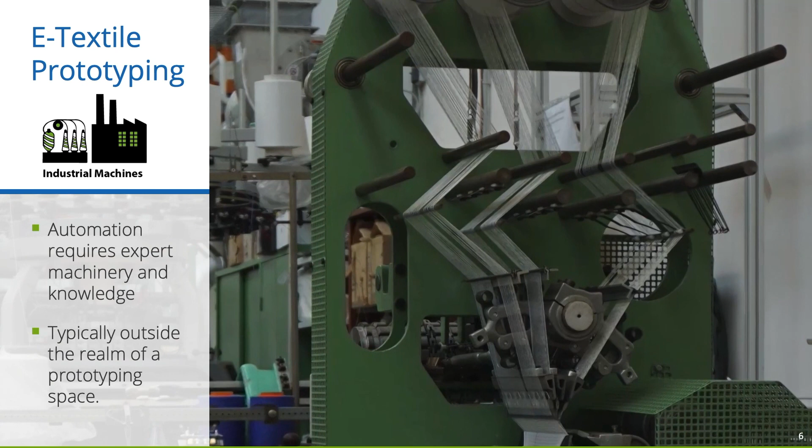While makers have great technical skills and the capabilities to innovate and prototype, they often use manual sewing techniques. However, manual fabrication at the yarn level is quite time-consuming and cumbersome. In addition, textile and fashion designers require wearable prototyping toolkits for early design stages, but they commonly do not have access to expert machinery. These kinds of machines are typically outside the realm of a prototyping space.

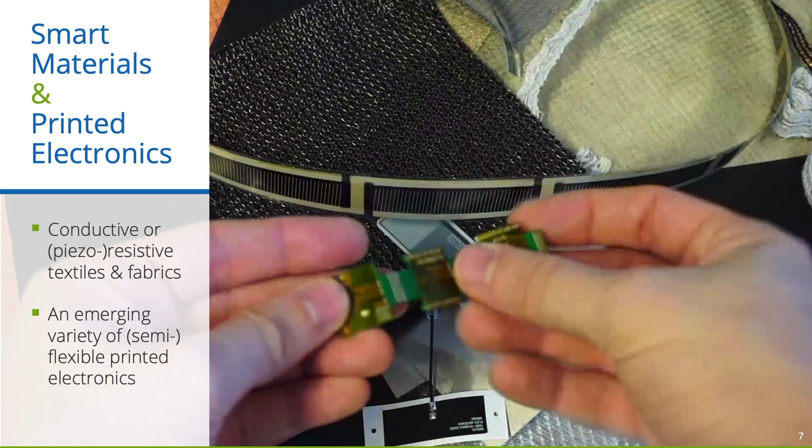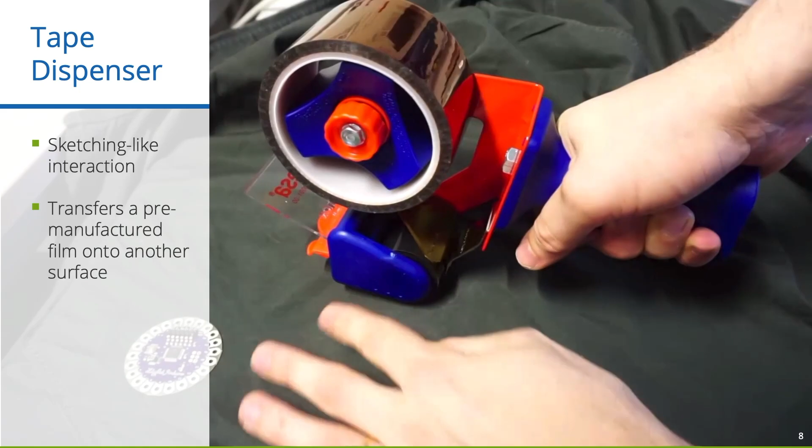By looking at emerging materials like conductive or resistive fabrics, as well as the continuous progress in flexible and printed electronics, we thought about how we could develop an easy and sketching-like fabrication approach. Inspired by the sketching-like interaction of handheld correction tape or packaging tape dispensers, we introduce Rapid Iron-On User Interfaces, a novel fabrication technique to combine design and fabrication into a single process.

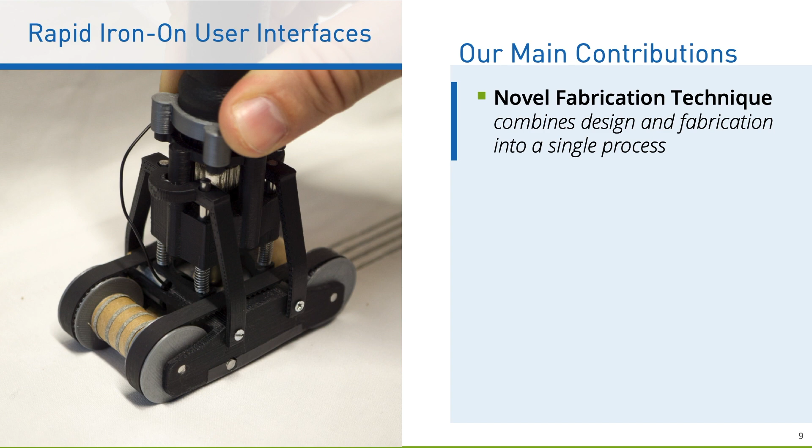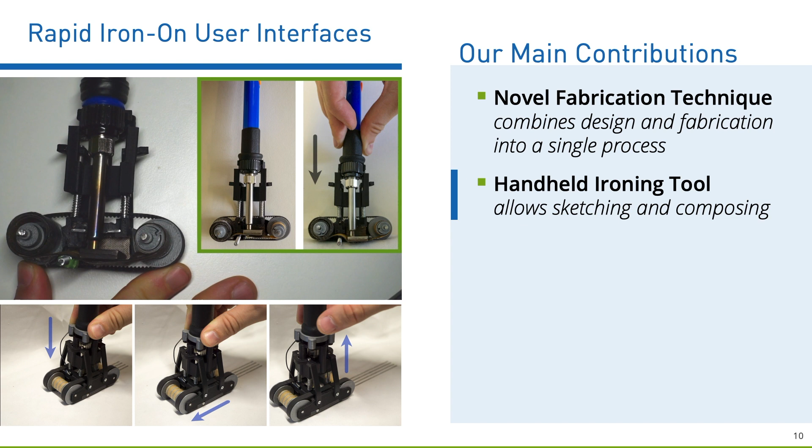We developed a handheld ironing tool that directly transfers adhesive functional tapes and patches onto fabrics. The device uses an iron that can be pushed for bonding tapes via heat activation. The tapes themselves are rolled on spools with a carrier layer. As you can see in the video, it is possible to iron on traces in a sketching-like fashion.

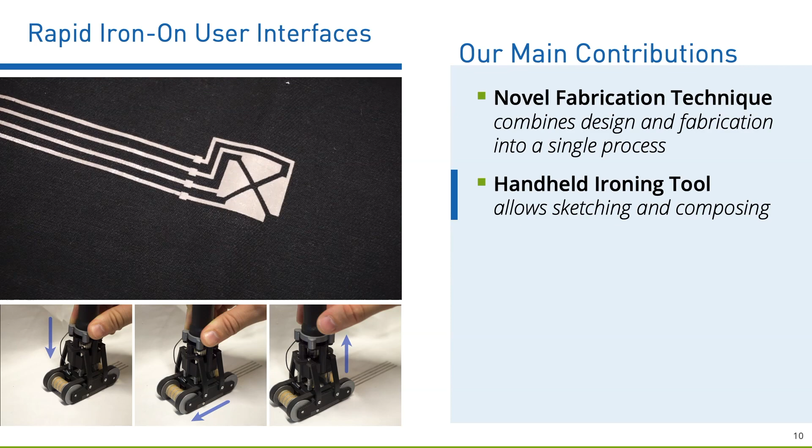Further, we looked at several components that could be ironed on and introduced a comprehensive library of components. To demonstrate the versatility of our toolkit, we also implemented applications for ubiquitous and wearable computing. Finally, we conducted technical experiments as well as expert reviews. But before I go into details, I will briefly position our work in the context of prior research.

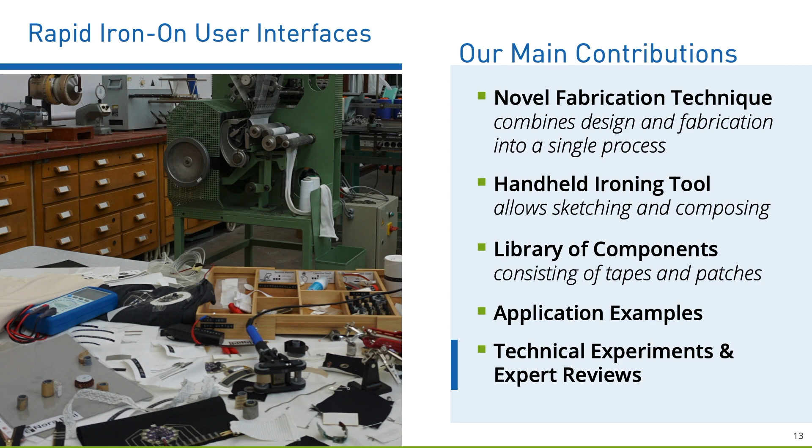Looking at crafting techniques, Buechley and colleagues pioneered the LilyPad platform that allows connecting electronics with conductive yarns and laser-cut fabrics. In addition, Kit-of-No-Parts introduces an approach of crafting electronics rather than designing discrete components. Schnittmuster discusses a meta toolkit.

In contrast, ready-made toolkits allow prototyping with prefabricated components. Research like iCatch, MakerWear, and BodyHub build on the idea of customizable, body-worn building blocks. Finally, Z-Badges enable resistive and capacitive sensing and can be ironed onto textiles.

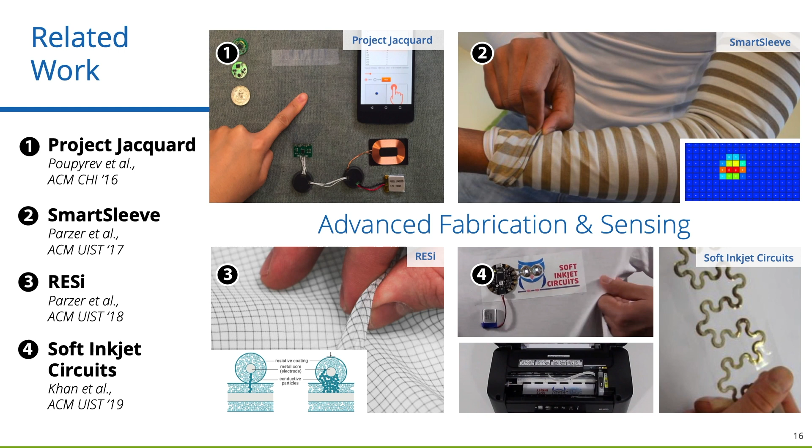Furthermore, projects like Jacquard demonstrate how smart textiles could be produced at a large scale. SmartSleeve and RESi introduce on-clothing interaction based on resistive sensing matrices. Soft Inkjet Circuits demonstrates how multi-material inkjet printing enables circuits on a variety of substrates, including iron-on textile films.

Since our work is inspired by cuttable smart tapes, we also looked into this research. While Shape Tape and Sensor Tape capture deformation, Touch Tape allowed sensing of a hand's position. Amohr tapes are commercially available, highly conductive and stretchable textile ribbons.

Finally, research has been done in interactive fabrication and construction. Most related to our work is Sketch and Stitch, which combines the design of components by sketching and the fabrication by using an automated embroidery machine.

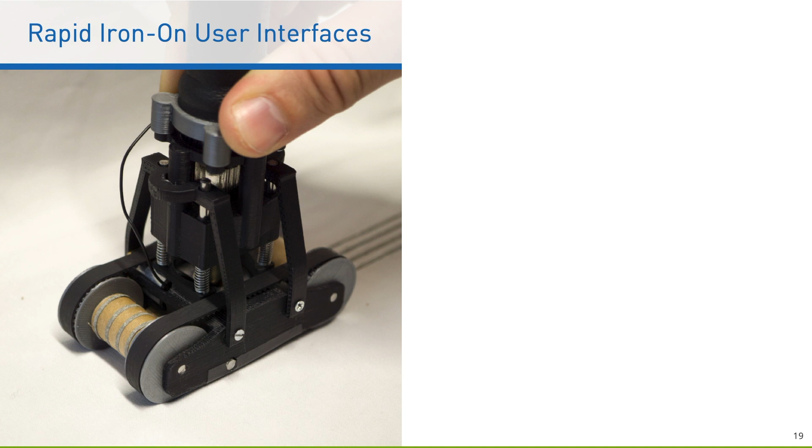Let's get back to our Rapid Iron-On tools and see how the ironing process works in detail. The first thing I want to talk about is the way we constructed the material spools.

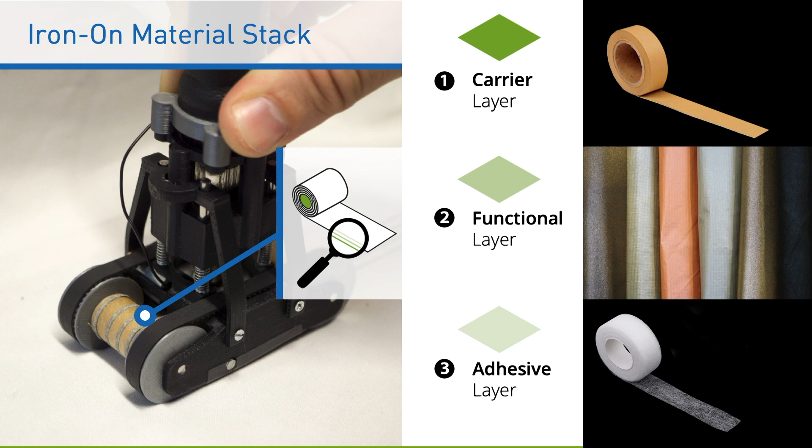The iron-on material stack basically consists of three layers: a carrier layer, a functional layer, and an adhesive layer. The first layer serves as a carrier for all iron-on spools and is made of heat-resistive baking paper that we coated with sticky glue.

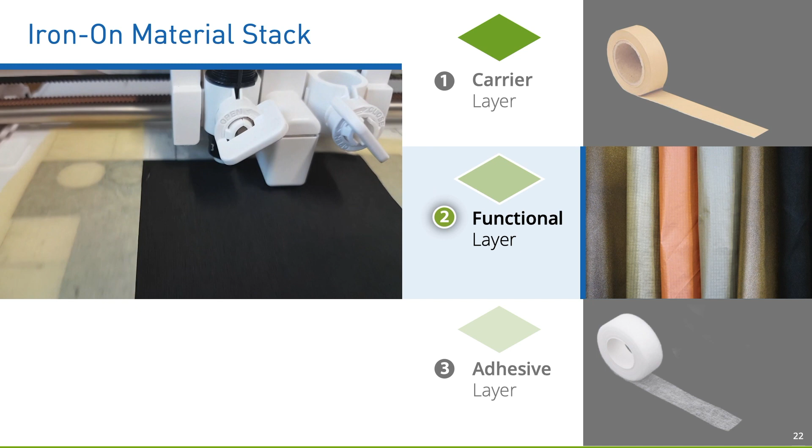The most important part of our spools is the functional layer, which consists of materials like ultra-thin conductive fabrics. Most spool materials are fabricated with a vinyl or laser cutter, but as we will see later, it is also possible to integrate rollable, printed, electronic, or sandwich materials.

The last adhesive layer is made of fusible web that is bonded with the functional layer. We transferred all designs to the carrier layer and rolled it onto spools.

But what can we do with the Rapid Iron-On tool? Let us start by looking at the fabrication of traces and circuits.

Working with traces and circuits had to support multiple actions, including creating, connecting, bridging, or deleting traces. On the other side, they require special properties like good connectivity, an easy arrangement, special shielding, stretchable and multi-layer properties.

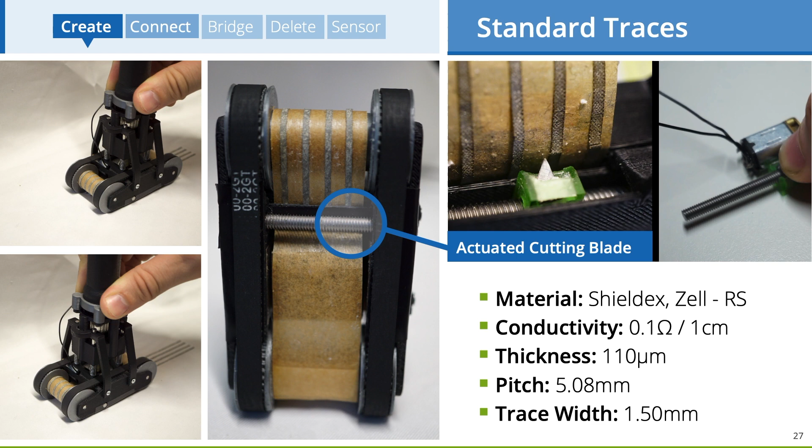Wow, this is a lot, but let us see how we can tackle these challenges with the Rapid Iron-On approach. We fabricated different trace spools, including standard traces, as well as stretchable ones in different sizes. Standard traces consist of high conductive fabric with a thickness of 110 microns and have a pitch of 1/5 of an inch. To finish the sketching process, the designer can push a button to cut the trace with an actuated blade that we integrated into the tool.

In addition, we explore how commercial elastic ribbons can be used with our Rapid Iron-On dispenser tool, as well as design and fabricate our own ultra-thin stretchable trace by combining a horseshoe pattern with high conductive fabrics.

Furthermore, we introduce shielded traces that consist of a conductive outer shield and a core trace that is sandwiched by 2 isolation tapes. The whole tape is just 350 microns thick and very flexible.

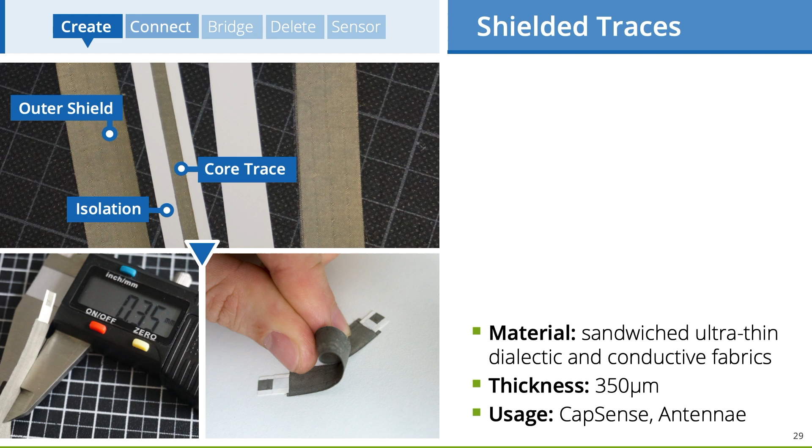Next, I will briefly describe how traces can be connected. Single-wire traces can be connected quite easily by creating a new one on top that overlaps with an existing one. The great thing here is that connections did not have a negative effect on the overall resistance, as we have shown in technical experiments. Multi-wire traces can be extended in the same direction, but how do we realize angles and crossings for multi-wire traces?

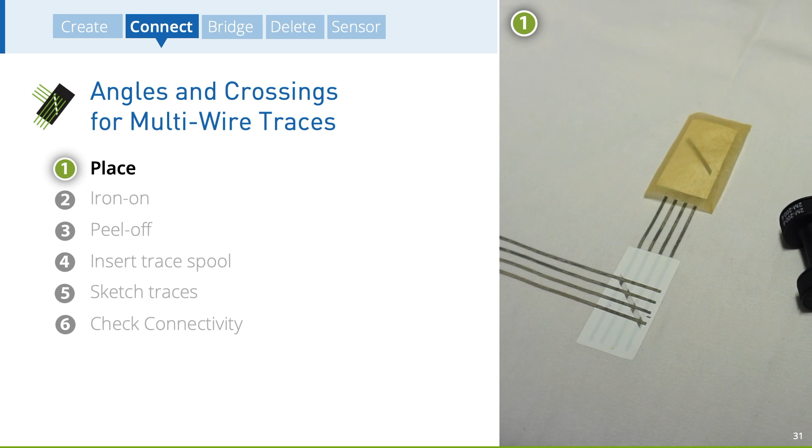If a user wants to attach an angled connection to existing traces, a connector stencil could be placed above, ironed on by using our tool in ironing mode, and finalized by peeling off its protection layer.

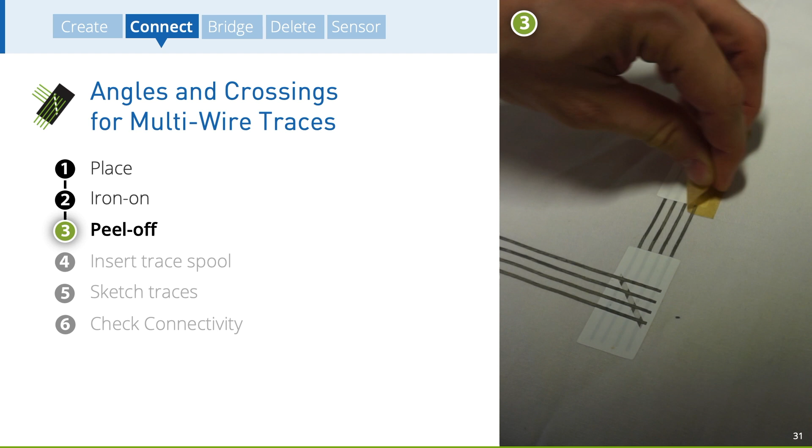In order to continue the sketching, the designer had to insert a trace spool and check whether the axes move correctly. Next, the user can place and align the tool and continue sketching. As a result, all traces are bridged, building a high conductive connection.

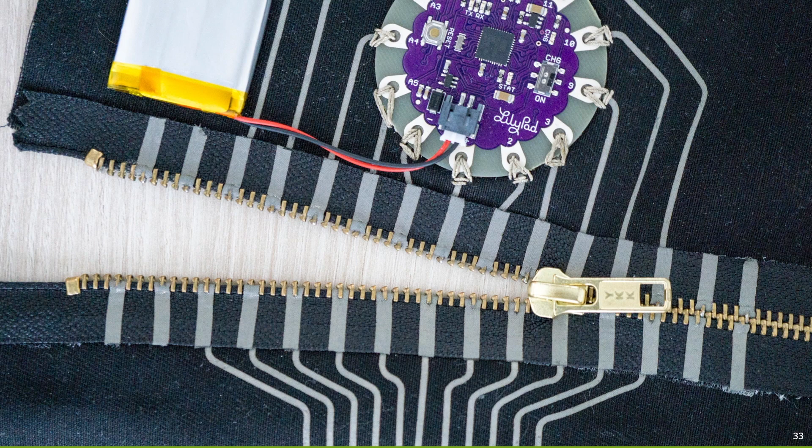But what about reversible connections? Wouldn't it be good to utilize already existing mechanisms, like zippers? Based on our Rapid Iron-On fabrication approach, we introduce a connection zipper that can be used as a multi-trace connector to physically bridge traces. Therefore, the designer can literally iron the traces to the teeth of the zipper.

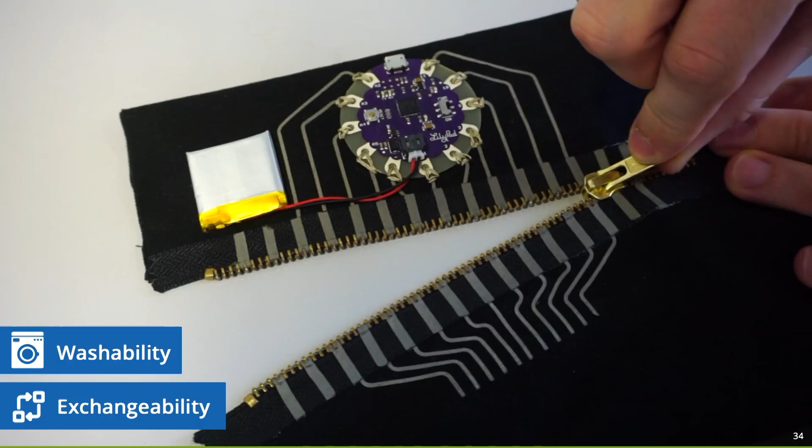Zip-on connections can be useful as exchangeable mechanisms for multiple purposes, like detaching electronic parts before washing or changing modules depending on the context. In addition to the conductive fabric, we also explored how other material spools can be used.

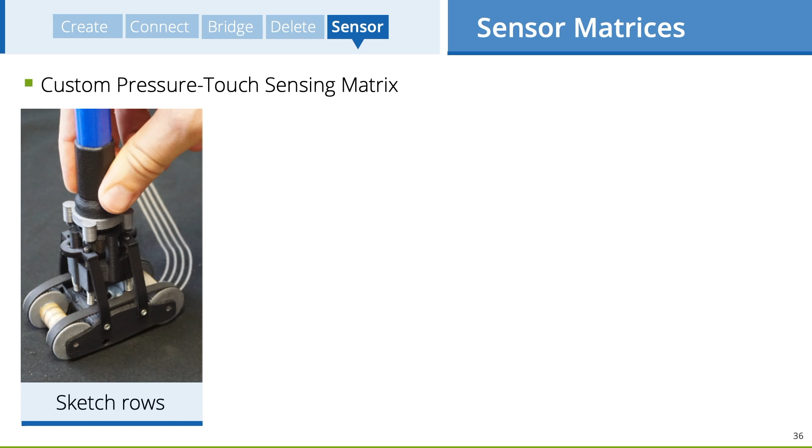For example, for building a custom pressure touch sensing matrix. Therefore, the designer first had to sketch sensing rows, and then change the material spool to piezoelectric fabric and sketch again above.

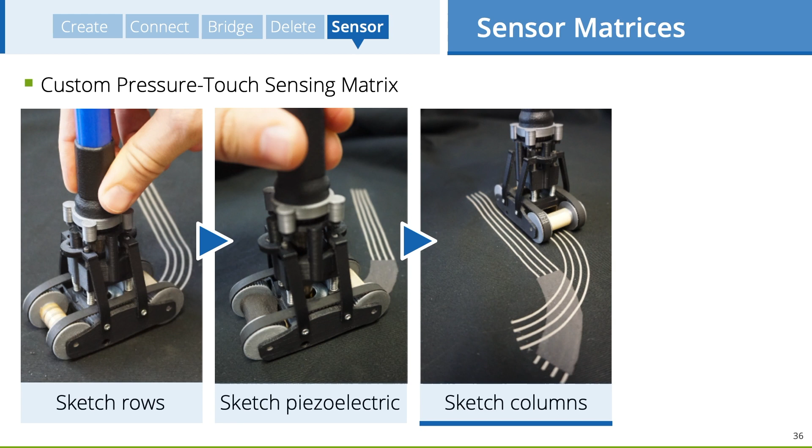To finalize the sensor, a last trace layer is applied. The result is a custom-shaped 4x4 pressure-sensitive matrix that works via resistive sensing.

As composition techniques, our approach supports the arrangement of different spools side by side, and the layering of tapes and patches, as well as the utilization of textile accessories.

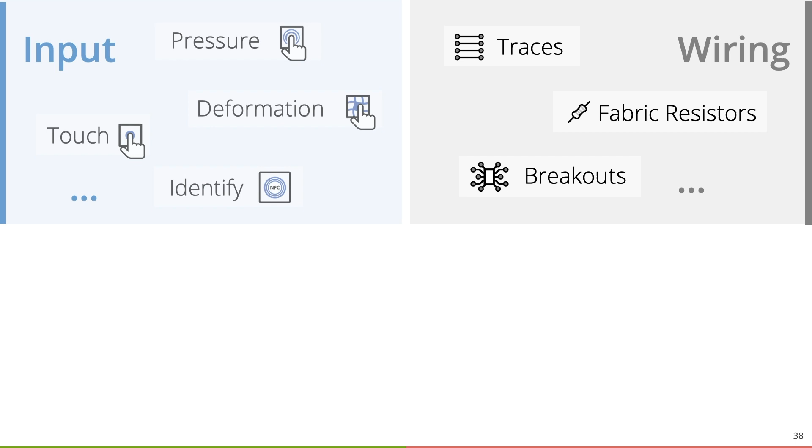So far we have learned to manage wiring, right? But what about further input, output and computing components? With our work, we also introduced a comprehensive library of components, which are mostly realized as functional patches to be ironed on in the same manner.

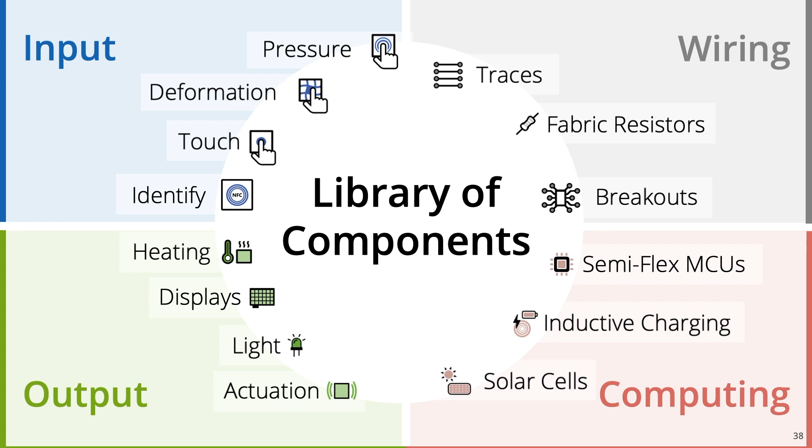Therefore, we explore how the versatility of available flexible components can be made ready to use for the Rapid Iron-On approach. In the following, I will briefly discuss selected representatives of each class.

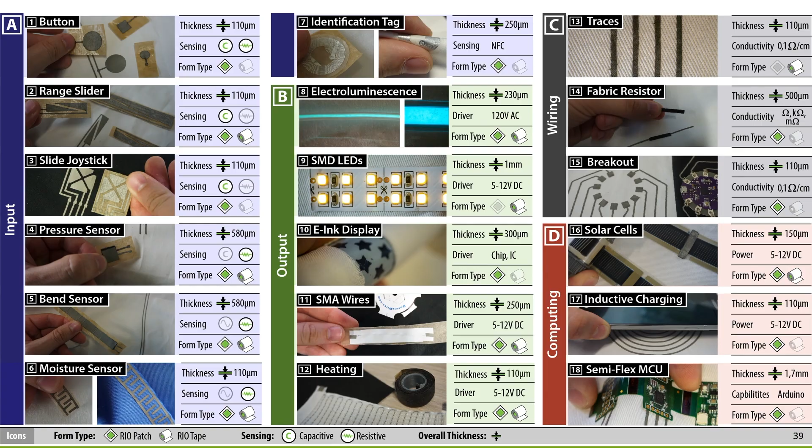So as basic touch input, we fabricated ready-to-use capacitive input controls, including buttons and sliders. They can be simply placed and ironed.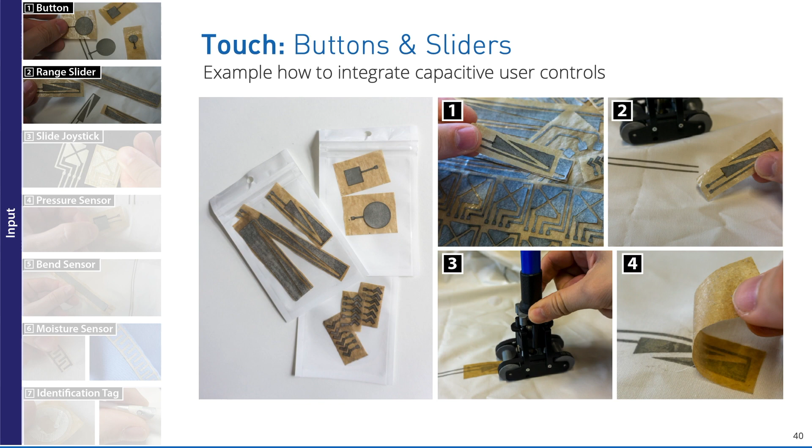Furthermore, our library also includes prefabricated pressure and bend sensors that are made of a stack of conductive and piezoresistive fabric. In addition, a designer can place an identification patch, then iron the tag using our Rapid Iron-On tool, and...

finally peel off the protection layer. The result is a flexible and strongly connected tag that could be used, for instance, inside a lab coat for access control.

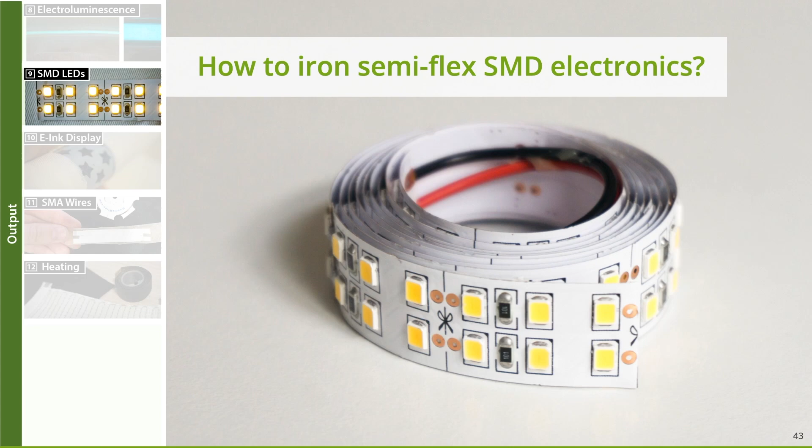But how can we iron more rigid semi-flex electronics like this SMD LED tape? We fabricated different irons with unique cutouts. If we look, for example, at the U-shaped iron, it is possible to avoid contact with the small LEDs and only iron the edges of the tape. This technique allows us to iron on SMD LED tapes.

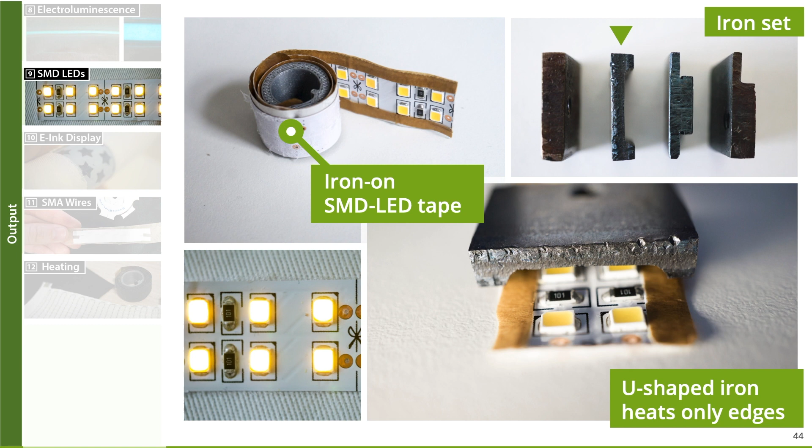Furthermore, we also have resistive heating patches and tapes. In order to support computing components, we combine flexible solar cells with fusible web to make it iron-able. The tape is cuttable at any position and provides enough power to charge a battery.

To see how the toolkit works for real-world applications, we also realized three application examples. Our first one is a smart cuff button that acts as a direct and discreet input device, for example for controlling a slide deck during a business presentation. The interactive metal button can be slightly displaced in all directions and snaps back elastically while sensing its position. Technically, we used a capacitive 4-way slider button patch that we ironed under a cuff metal button.

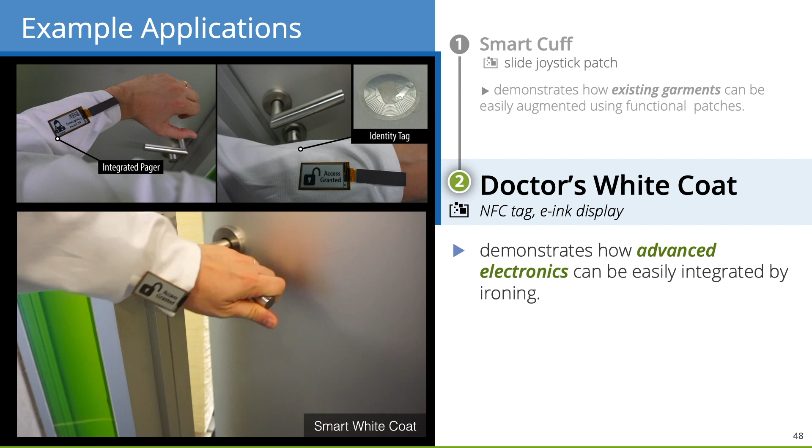Furthermore, we ironed an e-ink display and an NFC tag onto a doctor's white coat, providing access and pager notifications. This example demonstrates how advanced electronics can be integrated onto textiles.

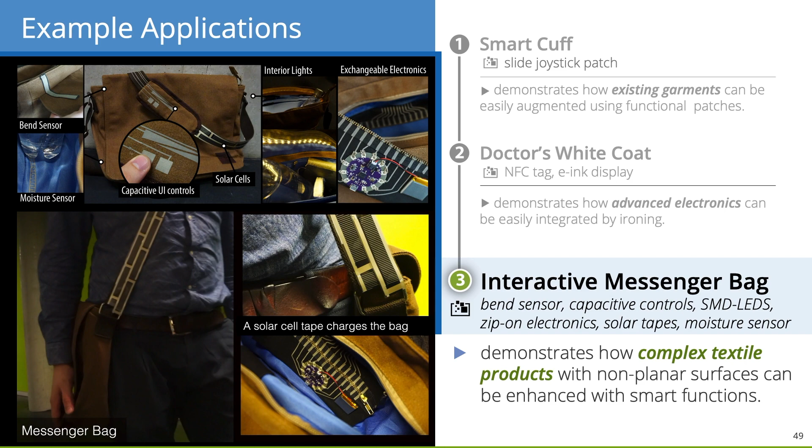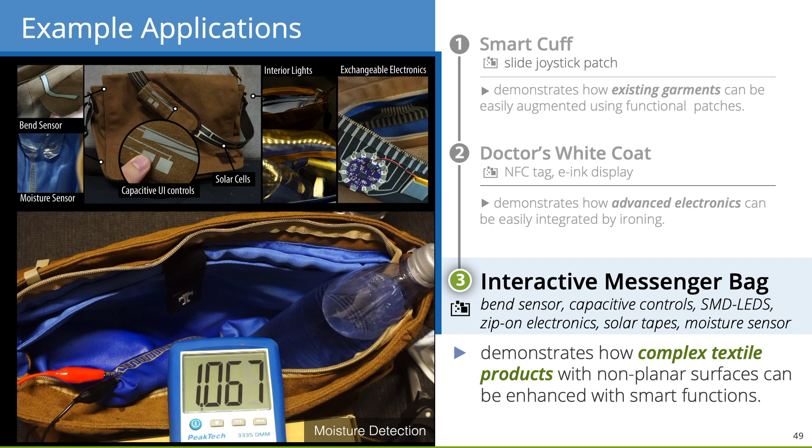Finally, we realized an interactive messenger bag with solar tapes at the strap. The bag's inside lights up if somebody opens it. Therefore, we used a bend sensor on the LED tape. In addition, we integrated a moisture sensor at the bag's bottom to sense whether a bottle leaks. Finally, a music player control made of capacitive touch widgets is integrated at the shoulder pads. The microcontroller can be zipped off to reuse it in other contexts.

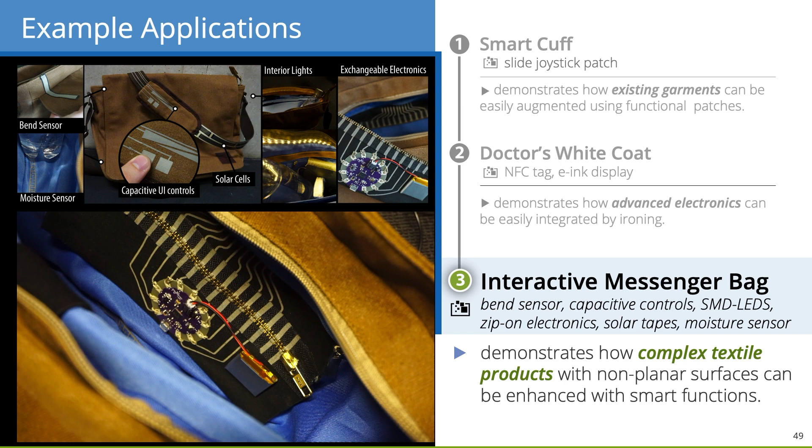So after we've seen the toolkit in action, I would like to talk about three expert reviews that we conducted. In order to speak with textile and fashion design experts, we drove to a French design university, physically presented our toolkit, and conducted semi-structured interviews. In addition, we also visited a textile machinery research institute in Germany, where we asked a machinery and fiber expert to test and review the rapid iron-on approach in an interactive hands-on session. Each interview took around 60 minutes.

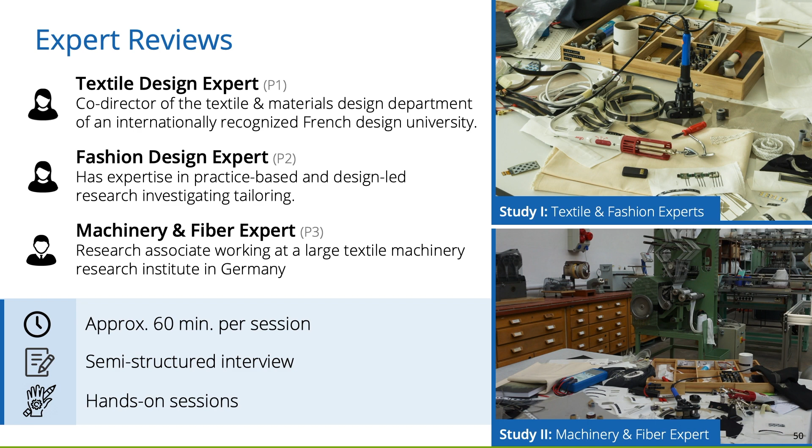The textile and fashion experts state that the iron-on roll and patch approach is in between large-scale production and manual crafting. This makes absolute sense. However, they also have concerns about adding tapes and patches, since they think it is important to work from the beginning with the final materials, to consider the visual and sensory qualities in the whole design process.

In addition, the machinery and fiber expert compared the rapid iron-on approach with other e-textile solutions. He stated that the production time, required knowledge, as well as costs are clear advantages. The scope of functionality is comparable, and the durability and the degree of integration is less good.

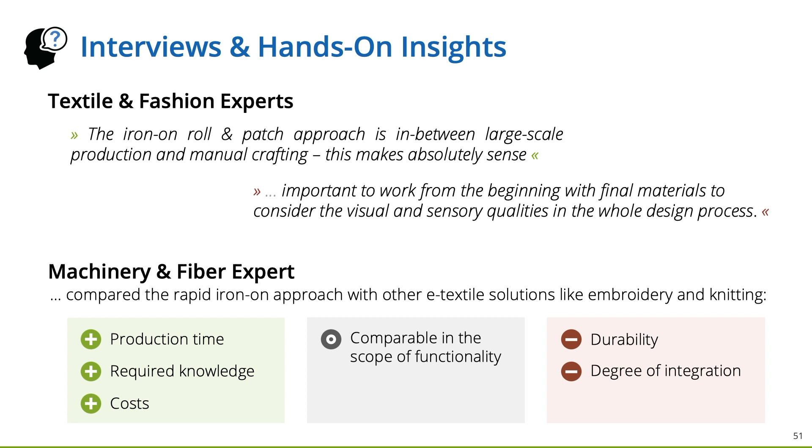So let us conclude. With our work Rapid Iron-on User Interfaces, we presented a novel fabrication approach for interactive textile prototypes that allows us to enhance fabrics with rich digital functionalities. Therefore, we developed a handheld ironing tool that directly transfers adhesive functional tapes and patches onto fabrics. With our comprehensive library of components, we demonstrated the technical feasibility and its widespread applicability. We further demonstrate applications for ubiquitous and wearable computing and reported findings from expert reviews that identified benefits, limitations, and opportunities for future work. As a next step, we plan to run workshops in design schools and makerspaces to investigate adaptation and usage practice.